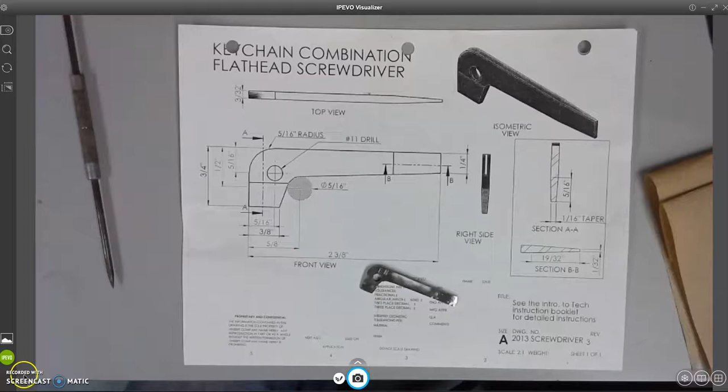Alright, today we're going to be going over how to basically read this engineering plan for the combination flathead screwdriver, and then how to eventually make it.

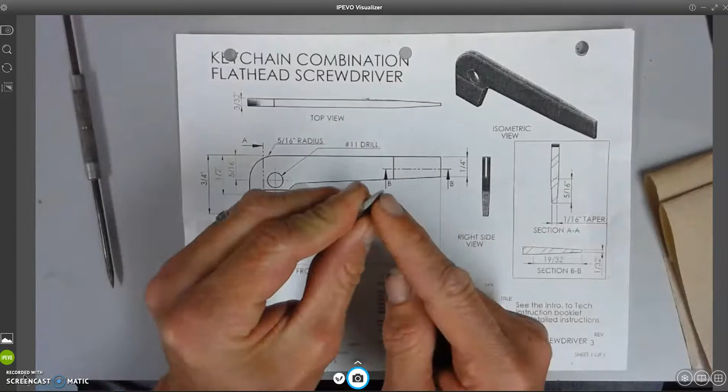I use this all the time as a flathead screwdriver. I can use it like that. It has a bigger flathead screwdriver on this side. I can use it like that. And pretty much every box I get at my house, I use it, and I just open boxes with this every day. It's on my keychain.

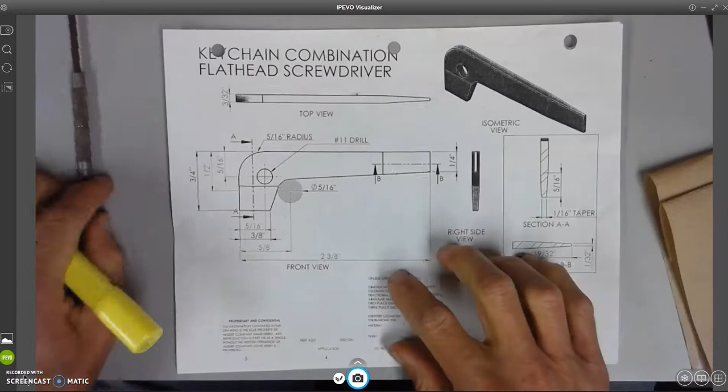And you're going to make one and put your initials on it and heat treat it. Alright, so reading the engineering drawing like this, it takes some practice, but basically a couple things to note is that we

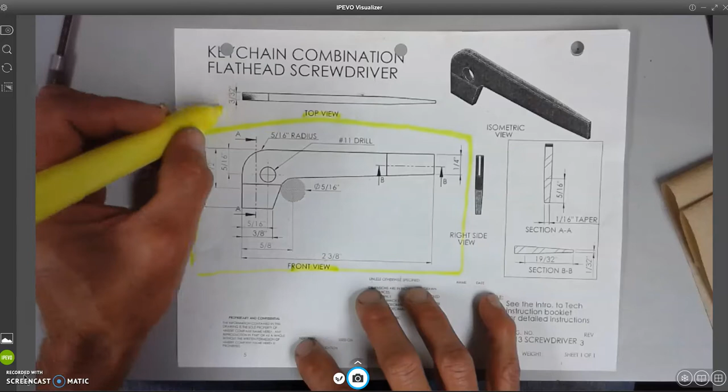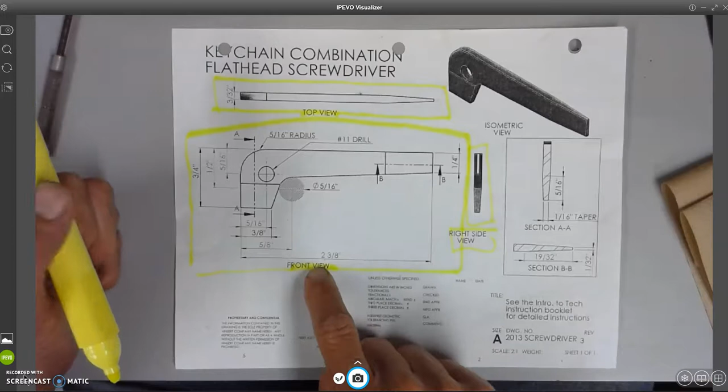have the front view, right? So this area right here is the front view. And then directly above it, we have the top view. So this part of the screwdriver up here is looking from the top, like you're a bird in the sky looking at the top. And then over here we have a side view, which happens to be the right side view. So this area is looking at the side of the screwdriver. So typically an engineering drawing has at least 3 views. Front shows the most about the part, top directly above, and then a side view.

We'll talk about the rest of the stuff later. And there's even an isometric view up here so you can kind of see what it looks like.

So what we have to do first is we have to basically get our metal. Let's talk about that for a second. So there are 2 bins of metal here. In this bin it says oil hardening tool steel, best screwdriver metal, $2 for a second try. So I have in my budget enough to have everyone have one of these. But if you make a mistake and blow it so much that you can't fix your piece, then if you don't want to pay any money, you can have a stainless steel one like this for free, but you cannot heat treat it, and you'll lose like a point or two.

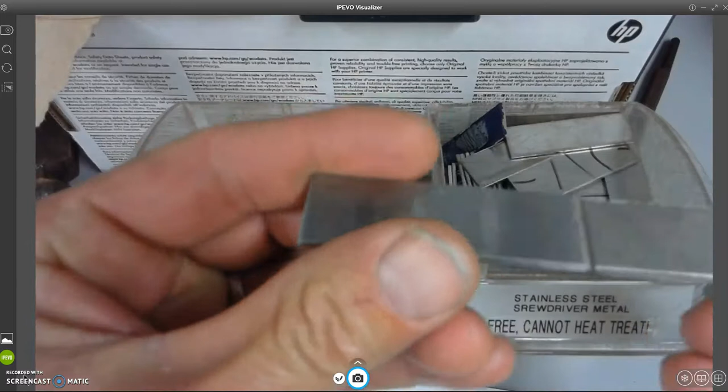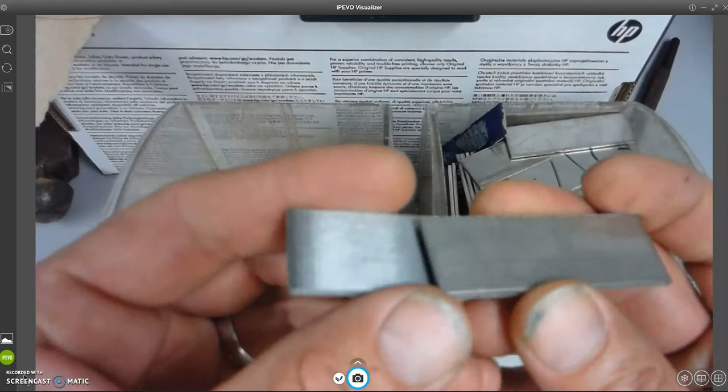When I take the paper off of this, I just want you guys to see this really fast. The difference I would say is that the heat treatable one, the nice one, looks like it has grains in the metal, whereas the stainless steel one really doesn't have that. So one on the left is the good one, the oil hardening tool steel, and the one on the right is stainless. So hopefully you can figure that out.

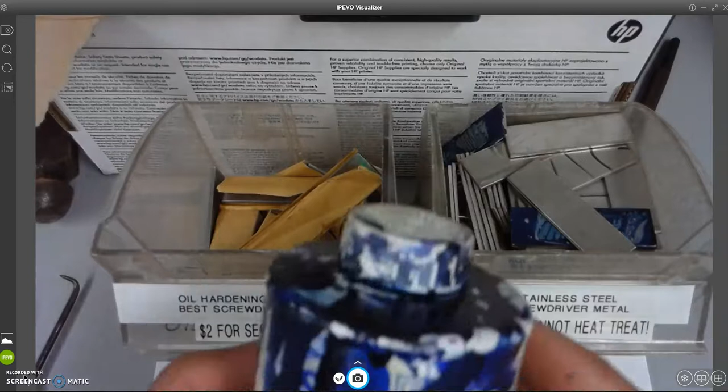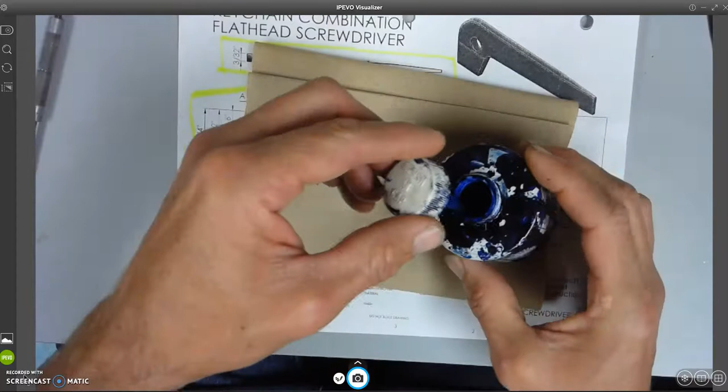Next thing you're going to want to do is you're going to want to go to the flammable cabinet and get some layout fluid, and it says steel blue on here. You're going to want to open this up, and there's a brush on the end, and you kind of want to go like this and kind of remove some of the layout fluid from the brush so it's more thin, but you don't want to get this on your fingers, and it really goes everywhere. So you want to paint a project that's relatively small with layout fluid so that, well, I'll show you in a second, but it'll help with layout later.

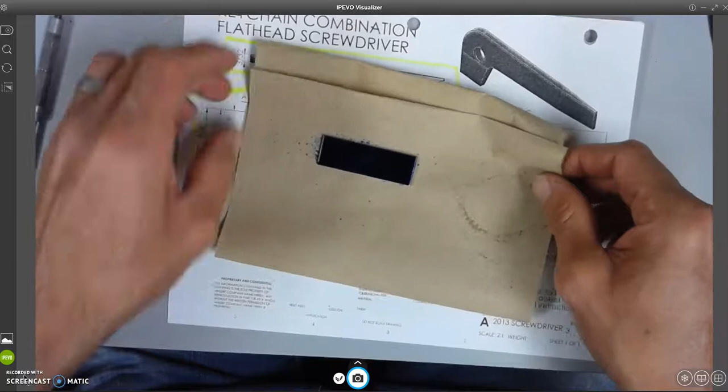So put a cap on that, try not to spill it, and I used a paper towel here. I'm going to put this out of the way, and I have one here that's dry and ready to go. It takes about 5 minutes to dry, and if you get it on your fingers it'll come off, but it'll take a little bit of scrubbing. Okay, so that's called layout fluid.

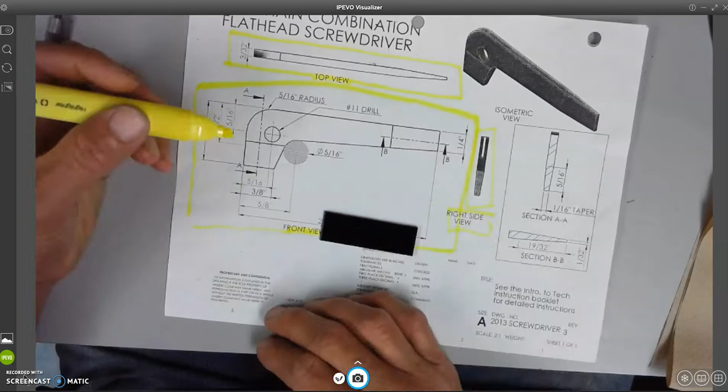So on this project, what we want to do first is we're going to lay out these 2 holes. I have to drill these 2 holes in the project, and I want you to basically get an A on this project, so it's important we do this right. So this hole here, let's lay this one out first. There's a couple dimensions on this one.

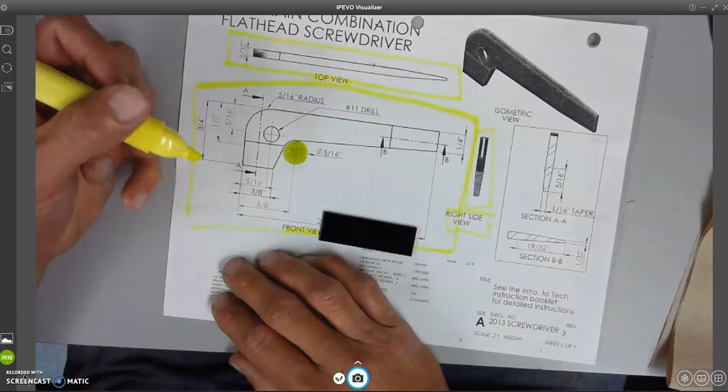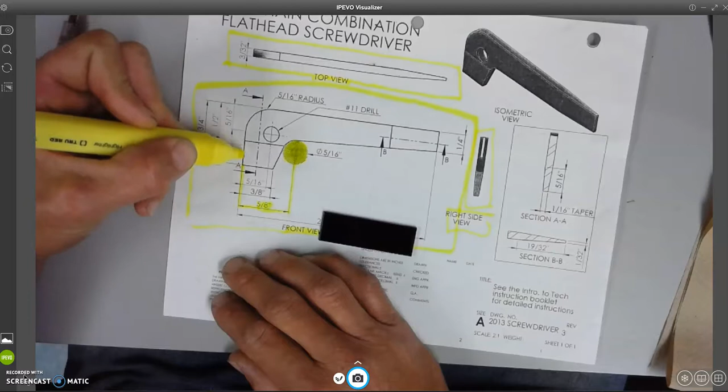If my eyes go down, I can see there's some kind of dimension there. It looks like this dimension here is telling me that this hole is 5/8 from the left side of the metal. Okay? It's

5/8 away. So you guys know about this thing, it's called a combination square. It looks to me like on this one there's 32nds of an inch on this side, 16ths of an inch on this side. Flip it over. Looks like I got 1/8 of an inch here and 16ths there.

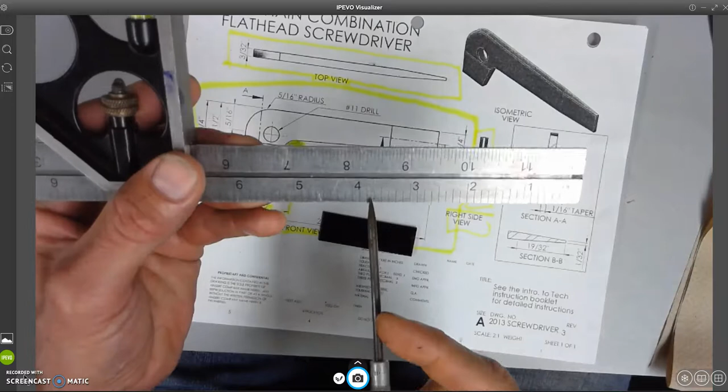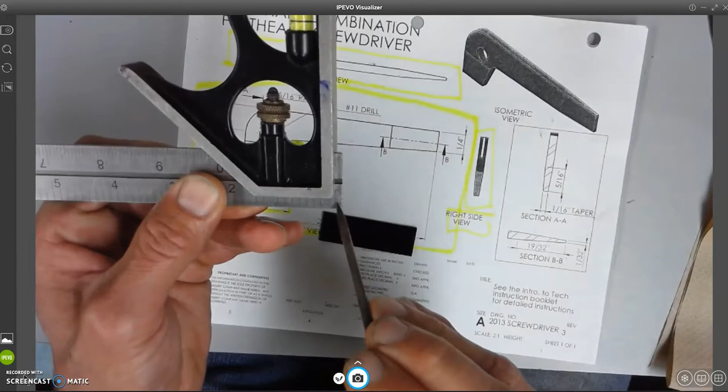So because I have 8ths and my dimension's 5/8, I'm going to go ahead and loosen this nut a quarter turn. This is 0, so right now it's at 0. And I'm going to slide it out. So right now it's at 1/8. And if this line is flush with this, you're setting it correctly.

So I'm going to move it now to where the 5th mark is flush with this space here. It's flush with this. And I'm going to lock it in. So now, quarter turn, it's locked.

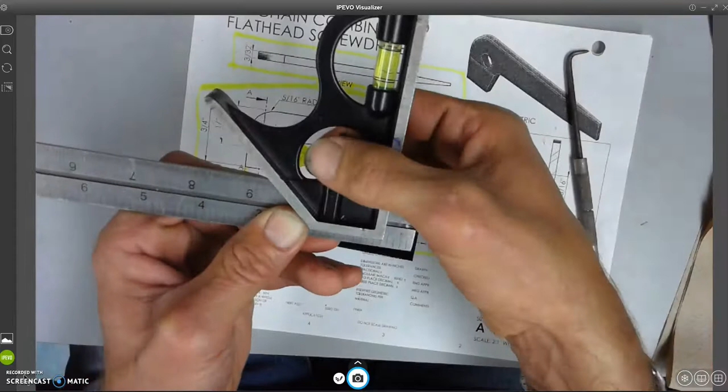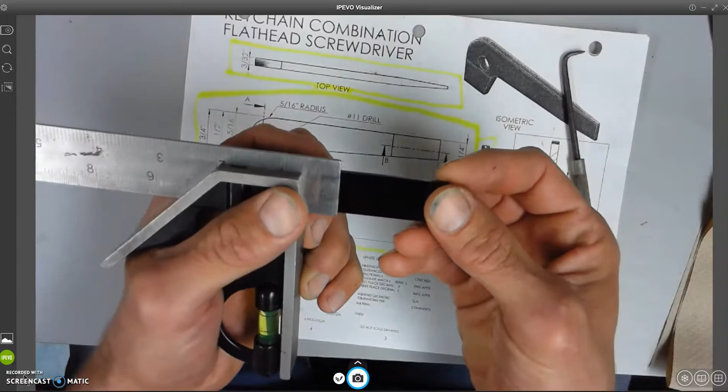It's locked in. I want you to hold this in your left hand. I don't care if you're left or right-handed, hold this in your left hand because the dimension is from the left side. And I'm going to now put my screwdriver underneath like this, and my finger is holding it. I'm very comfortable right now.

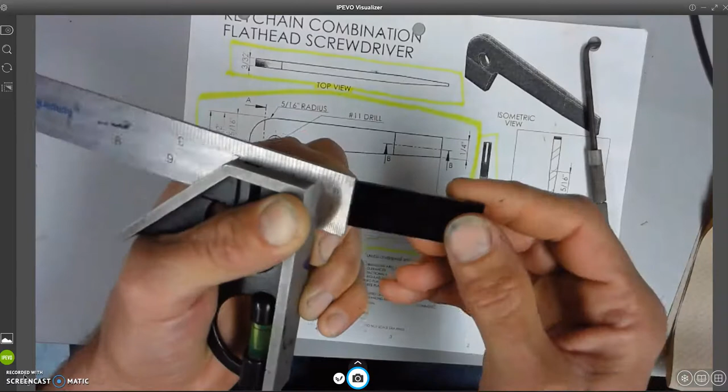Okay, so this is called a scribe. This thing's called a scribe. And I'm going to do just one time here. I'm going to go like this, right here, kind of angle it like that, and one time to make a scribe. And you can see that line really shows up. It really shows up.

What I don't want you to do is go back and forth with this. Do not go back and forth. Maybe a second time, if you missed it, you could do a second time, but don't go back and forth like this, all right? Next thing is

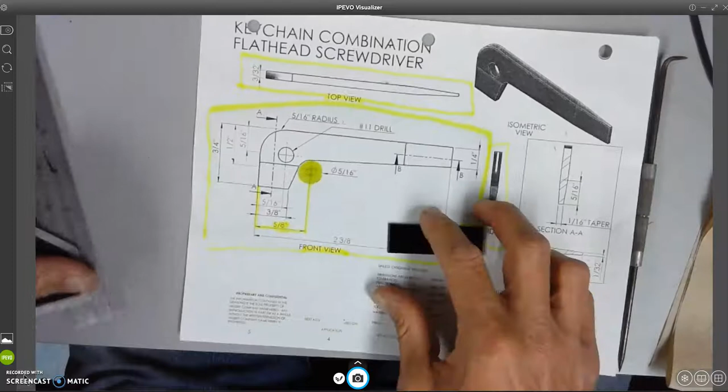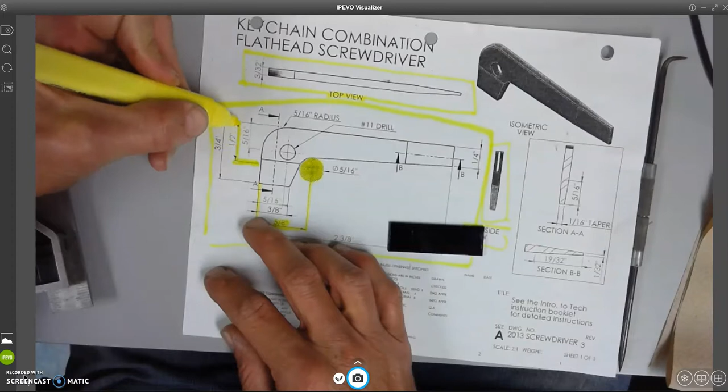If I follow my eyes directly over here, I see there's a dimension over here. What's that? Okay, it looks like it's a dimension that's measuring from the top of the screwdriver, and it's 1/2 of an inch.

So I have to loosen this up. 4/8 is the same thing as 1/2 of an inch. So 4/8 or 8/16, they both reduce to 1/2, right? So make sure if you want to get an A that again, this 4th mark or this 8th mark is flush with this right here.

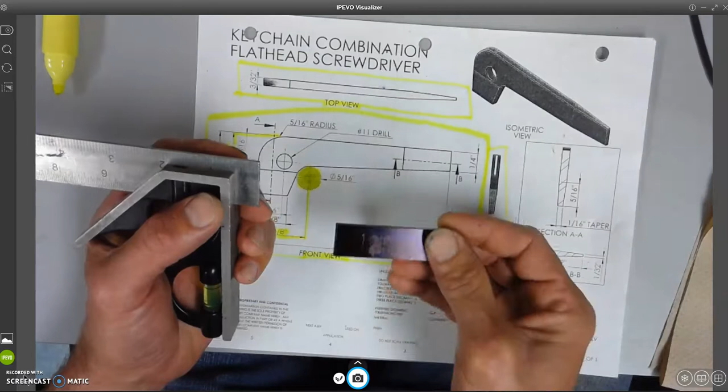So now what I'm going to do, I recommend not rotating this screwdriver here, just keep it like this the whole time. Students tend to get things backwards and mirrored and stuff. So instead, I'm just going to move this to the top. Okay, so I have it on the top, I'm very comfortable now. One hand, and I'm just going to do one scribe here. Okay, so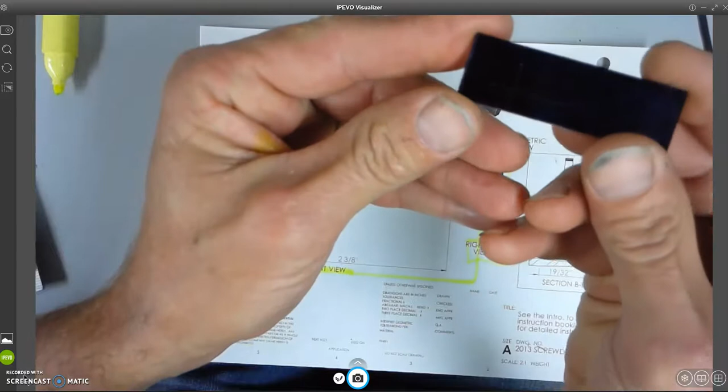I have what's now called my crosshair. You can kind of see it, why we use layout fluid. It helps show markings more clearly than if they are bare metal.

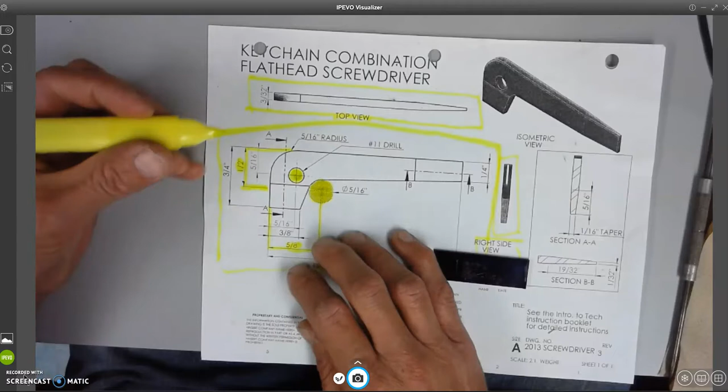All right, so next I have another hole here. Here's my second hole I have to drill in the drill press. And what's the dimension of this one? Okay, well, it looks like if I follow my eyes over to the left, I see a dimension. Okay, the dimension is 5/16, and again it's from the top of the screwdriver.

All right, so let's go ahead and do it.

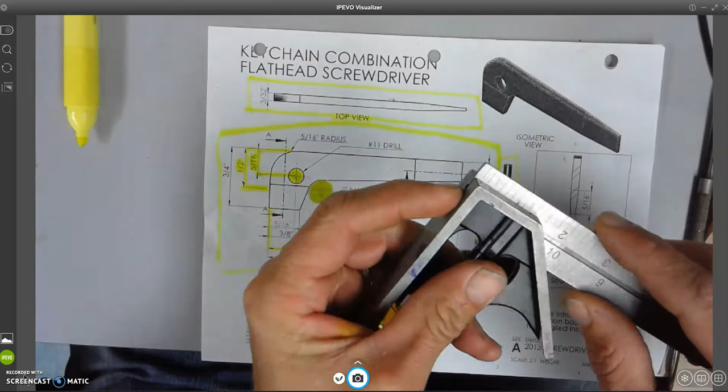So again, here's my combination square. It's at 0, and I'm going to move it out to the 5th mark and lock it in. So now I'm looking at this side of the ruler where there's 16ths, and I got 0, 1, 2, 3, 4, and the 5th one there is just barely visible.

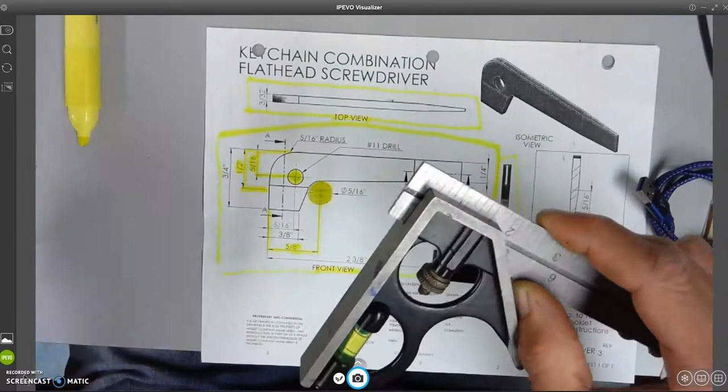All right, so again, the dimension is from the top, so I'm going to rotate this to the top. Very comfortable now, holding it in one hand. You don't need a partner or a buddy. And I'm just going to go ahead and do one scribe here. Boom. Done.

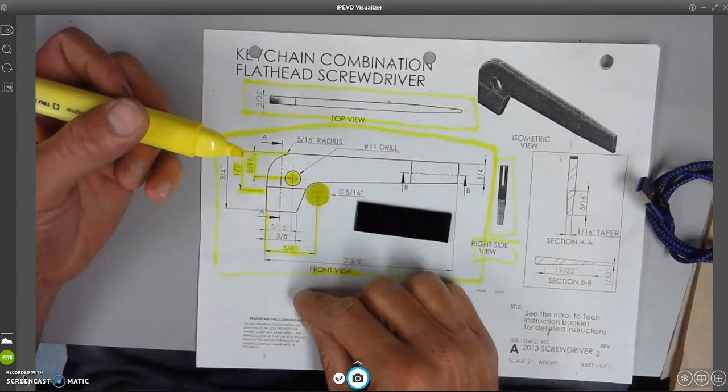Got the last thing is we have to figure out how far is this hole from the top or bottom. Do you see any dimension at all? Oh, I'm sorry, from the left or right? And the answer is yeah. If my eyes go down here, I see there's a dimension. Yeah, it's kind of crowded and cramped, but it's also 5/16.

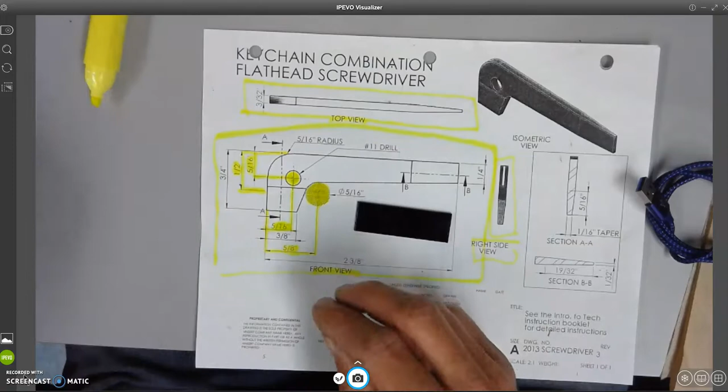This dimension right here, it's 5/16 from the left side of the screwdriver. So, do I have to adjust this? No, it's already at 5/16. So the dimension's from the left side of the metal. So I'm going to hold it with one hand in my left hand, grab my scribe, and just do one tick right there.

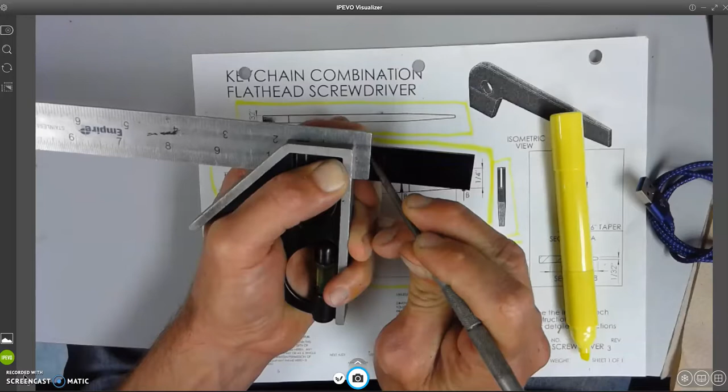Okay. Now at this point, students, it's possible to get a little confused. I wish the lighting was a little better. Let me put on my light.

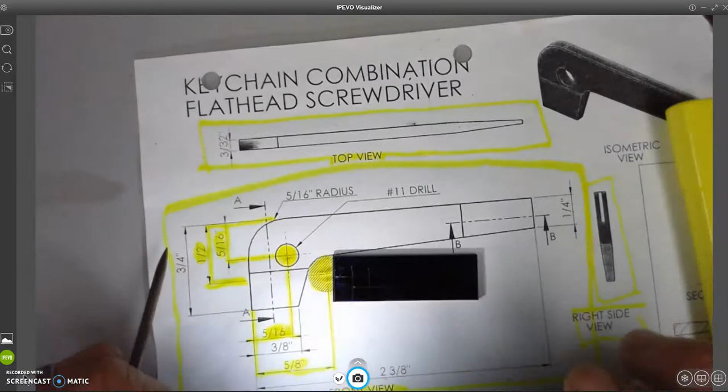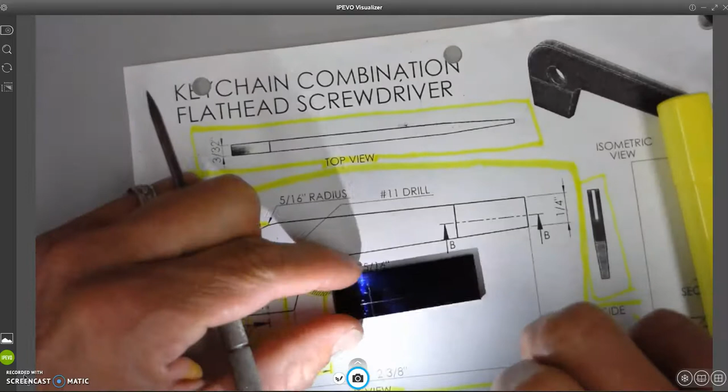All right, so sometimes students have trouble, like now they did this right, but they're like, well, where are my holes now? Which one's big, which one's small? And then there's always one student that will make this be the big hole and that be the small one. So just to kind of put it right next to the plan here, I'm just going to go ahead and circle this guy here. So that's my small hole right there, and then this is going to be my bigger hole.

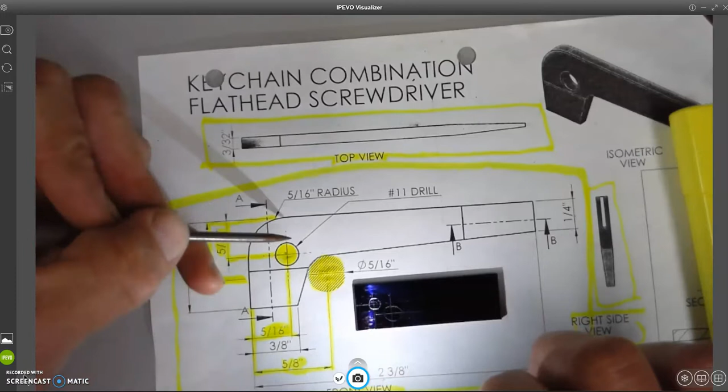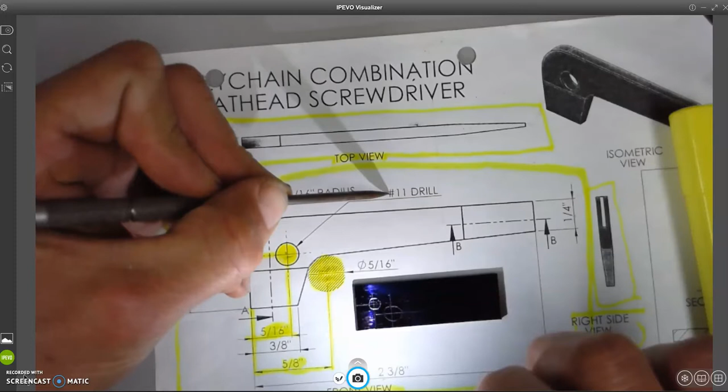Okay, so I got the light on there, you can see it. And what we're going to do is, first we have to get the right size drill. So what size is this here? Well, if you look at this arrow here, it goes up, and it says that this is a number 11 drill. So drills come in numbers, letters, fractions, decimals, metric. They come in all kinds of different sizes. So we're going to grab a number 11 drill, and we're going to grab a 5/16 drill. This circle here with a slash through it, that's the symbol for diameter, just so you know.

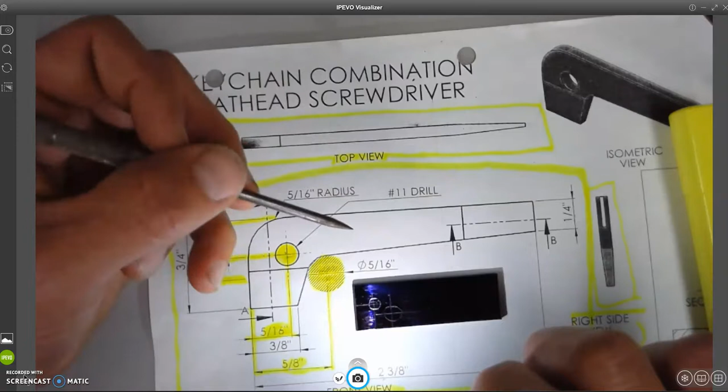So another thing in metalworking is that oftentimes, especially with steel and stainless steel, we'll drill a pilot hole, a smaller hole, and then enlarge it to the final dimension. So with that being said, we're going to drill both holes here, number 11, and then we're going to enlarge this one to be 5/16.

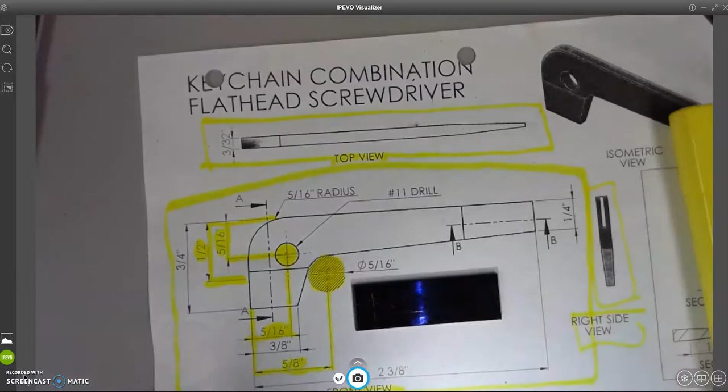So that's what you need to do. Now, what if you screw up? What if you mess up? Well, if you've only done the scribing and stuff like that, you have a choice.

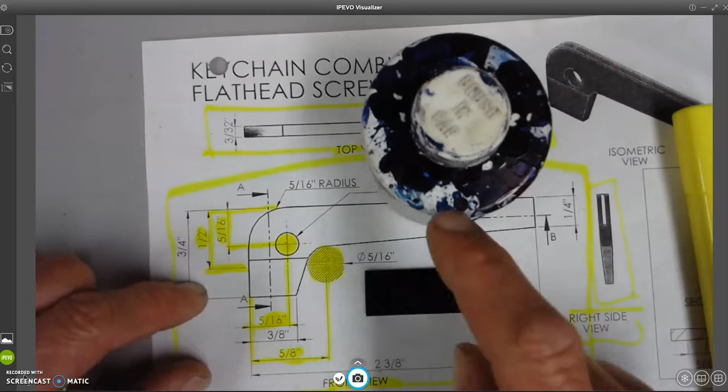You could just flip this around and lay it out there. But let's just say that's also messed up, well, you could just repaint the top, or you could repaint the bottom. But one thing's for sure, do not drill these holes until you get it approved by a teacher or adult aide.

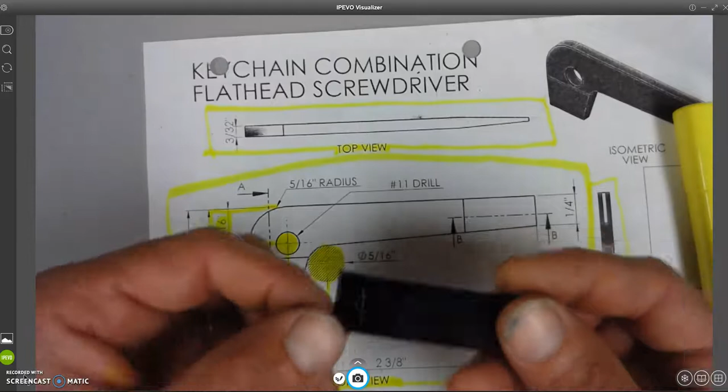So do not drill this or anything until you get it approved. And then if you come over to me, hey, Mr. Bees, this is great, I'll look at it, I'll say, yep, go ahead and proceed to the next step. Or I'll say, let's do it together, there's a little problem here. Okay, so get it approved, because we don't want to have you drill, because once you do that, we can't erase that very easily, that's for sure.